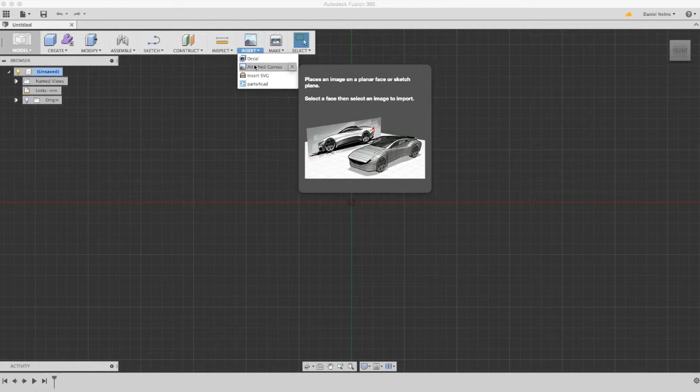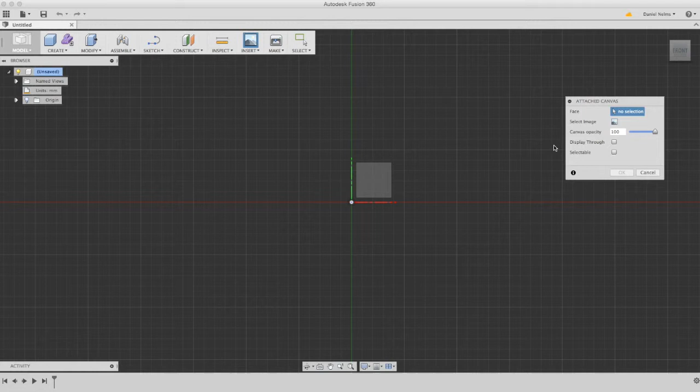I've already found an image on Google that I think will do the trick for me. This is one I downloaded on my phone and sent to somebody the other night. I've selected the image already, and I'm going to select this front view, this front plane, and that's fine where it's at.

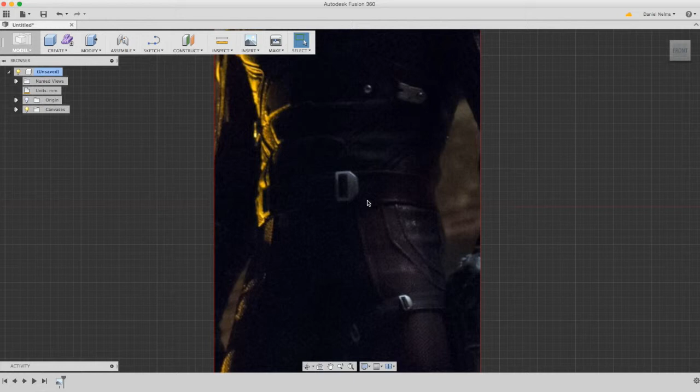Now you can see I'm zoomed out, but it's kind of small. There's a whole lot of things we could do to figure out just how thick this belt is, and I'll probably go out doing that later on, but right now I'm just going to do it quick and dirty. I'm going to assume that this belt, which looks a lot thicker than a normal average belt, is about 60 millimeters.

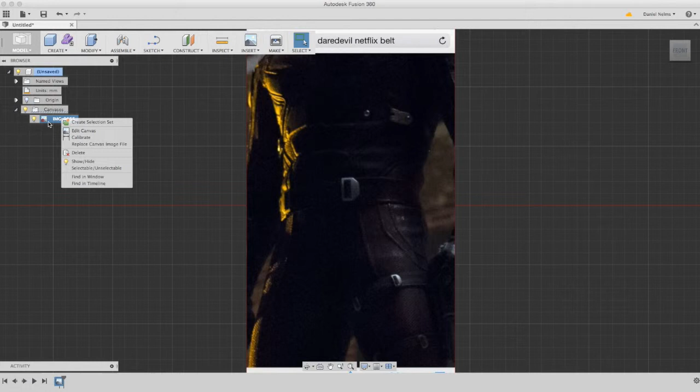So what I'm going to do is go find my image, this is the canvas that we set up, right click on it, and go to calibrate.

I'm going to zoom in, click on the top part of the belt, and click on where the bottom part of the belt is. Based on this image that I inserted, that's 1.8 millimeters. I'm going to calibrate this and assume that belt is 60 millimeters.

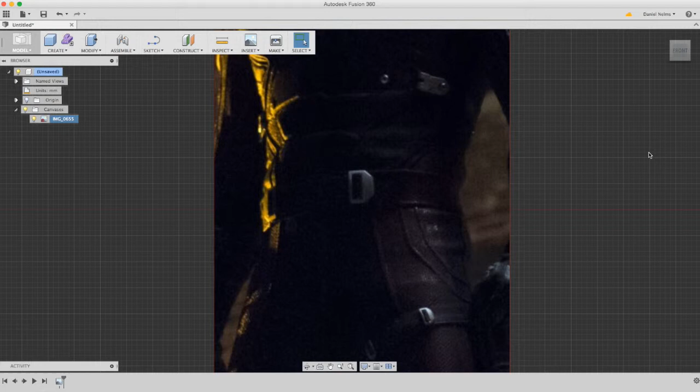Keep in mind this is a really low-res image, but that doesn't really matter. You can see it's blown this image up a lot bigger than it was before, so we can inspect it. Never mind, forget what I was saying.

Okay, I'm going to zoom in here. Here's the thing we want to make, right? So what you're going to do is go up here to Sketch, select a line, and just click anywhere.

All right, so we're just going to do a rough sketch of this whole thing here. Yes, I know I can see that there's a slight curve, but that doesn't necessarily matter. See, what I did was I went up there and made sure that I'm level. See what I did?

There we go. Now you see I just did a rough outline. You can see I kind of messed up right here, this portion is, I think, shorter than this, which is not good. But that's okay, I'm going to fix that.

We're going to measure this from the top down here to the bottom, and it is 60 millimeters. So obviously this buckle is just a little bit bigger than the belt itself, but that doesn't matter. The great thing about 3D drawings is you can scale them later. So if I found out that this was actually 80 millimeters or something ridiculous like that, I could just go in and scale up the 3D design later on. It's not a problem, it's real easy to do.

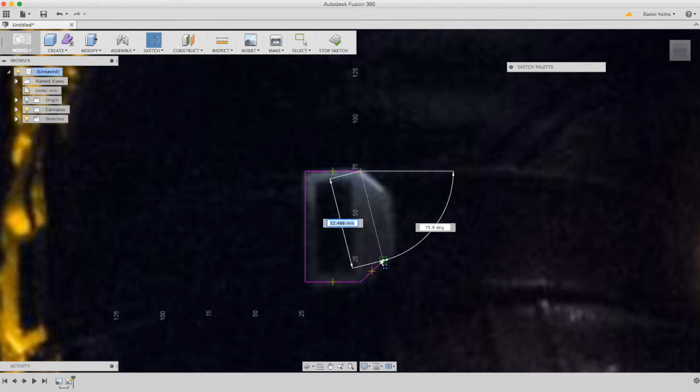I'm going to make another line here. I want it to be straight along here. I really wish I was better at explaining things. Okay, look, you can select a certain point, like right here, for example. So I want these two points to be equal, you know.

Okay, see that green? Man, I wish I could use my finger on this thing. You see the green line? That just means it's a straight line. That's what we want. Okay, and we're going to bring it down to 75.9 degrees. That's good enough, and we can just continue with this line. Okay, see? Nice, fancy, real easy to do.

Now you see that this belt actually goes along a little further, and to me it looks curved. In fact, it looks like it's not even level. That could just be some sort of artifact from the camera, or it could be that when they were doing this in the prop shop they were in a hurry, which is probably very likely, and didn't have time to make it straight. But since this is just going to be a replica, and we're just kind of messing around, we can take the extra time and make it straight, do it right.

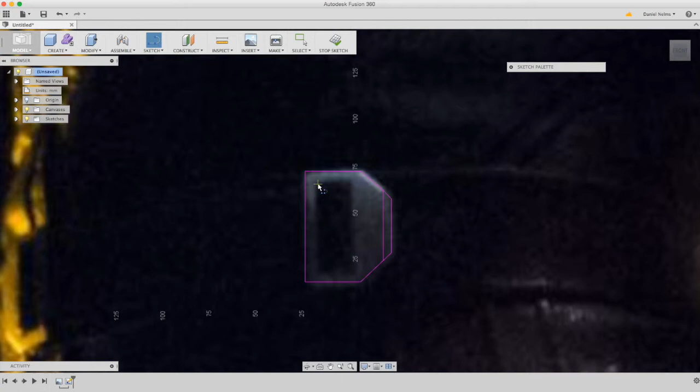So we've got this basic outline, and obviously there's a void here in the middle, so let's go ahead and do that too. See, the cool thing about this program is it will make sure your lines are straight if you let it. It's almost like a snap-to-grid kind of thing.

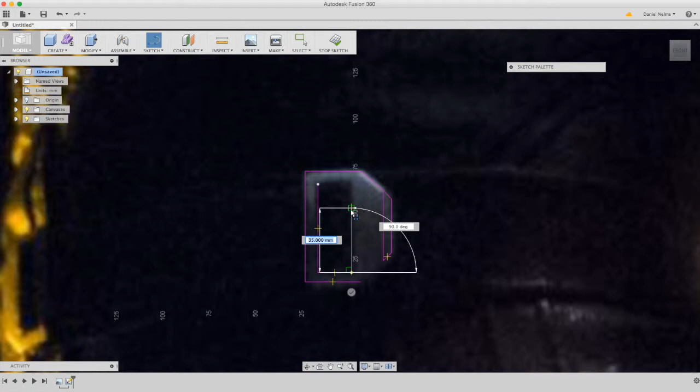So as I'm bringing the line up vertically, you see this little white line to the left of the targeting reticle? See how it's going up, up, up, up. We can keep bringing that up until it changes. Now you see that little white line turned kind of gray, and there are little green dashes in it. That means it's level with the line over here on the left side. That's what we want. We don't want some kind of oblong end where it starts up here and then goes down here. That's not going to look right.

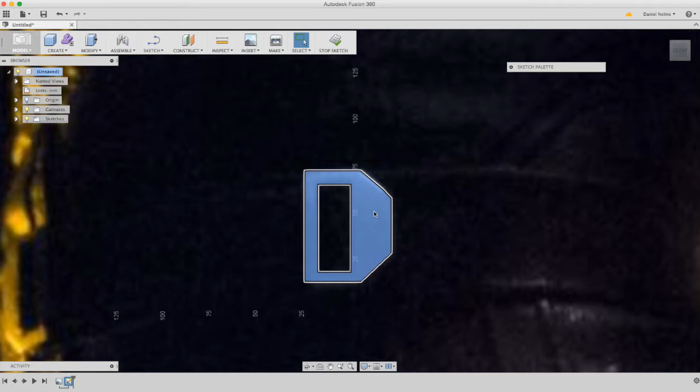So there you go. Went ahead and got rid of that other line. You know what this reminds me of? A belt buckle from a car, kind of. See, click it or ticket. All right, so there you go. There's your basic drawing. That didn't take very long, it took a few minutes. It took me longer just because I'm trying to explain how I'm doing this.

Doesn't have to take that long. Now look, you'll notice one thing here. There is, all right, 7.091, so 7 millimeters difference, distance from this point 1 to 2. But if you look at this point down here, there's only 5 millimeters difference. That's not good, I don't like that at all.

Okay, that's okay, see what I just did there? You can drag this up and down. I'm going to drag it about there-ish. Let's see how much space that takes up now. Excuse me. 6.2 millimeters, okay.

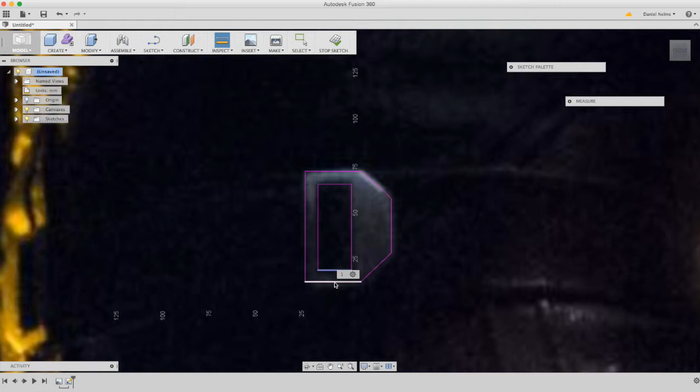That's probably not anything anybody's going to be able to tell with their eye looking at it, but just because, let's just see if we can get it a little bit closer to 7. I just went back down to where I started. That's not good. Okay, okay, let's try that.

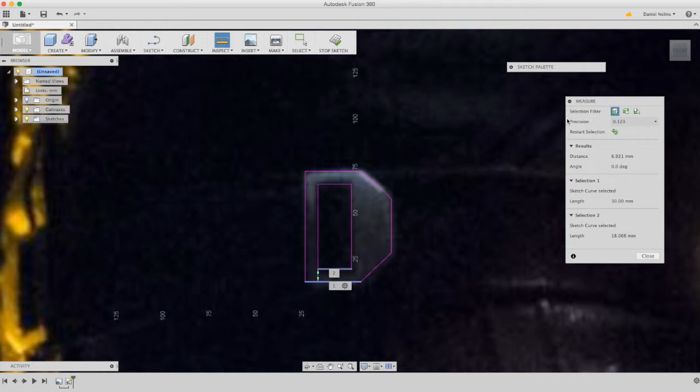6.921, I think that's good enough. Nobody's going to notice that little 0.1 millimeter, so yeah, I'm not worried about that at all. Okay, so now we've got this nice little box here.

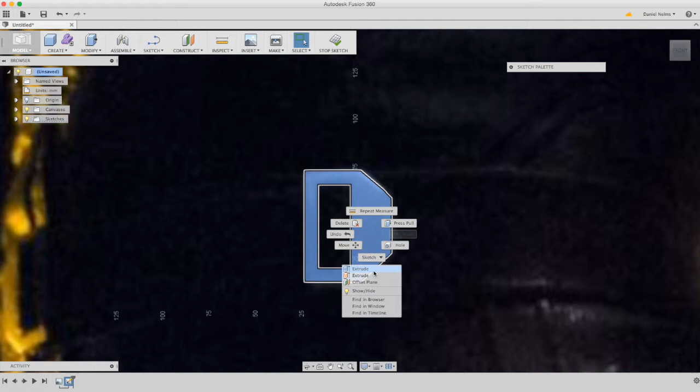This is just a two-dimensional drawing, and we're in a 3D program. So what we're going to do now is extrude this, turning this 2D drawing into something three-dimensional.

Let's see here, we can change our view over to the right hand side, and we can either type numbers in manually like so, or you can drag it up and back down.

Now just for perception's sake, 10 millimeters is 1 centimeter. That is about the size of a sugar cube - a sugar cube generally is a cube size of 10 millimeters, so 10 by 10 by 10. So if you've ever picked up a sugar cube, that's 10 millimeters.

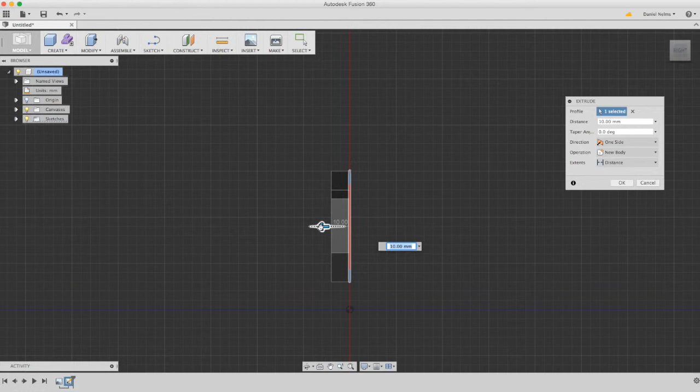I think that's too big for this belt. I'm thinking more like 5, maybe 6 would probably be better. So that's what I'm going to do.

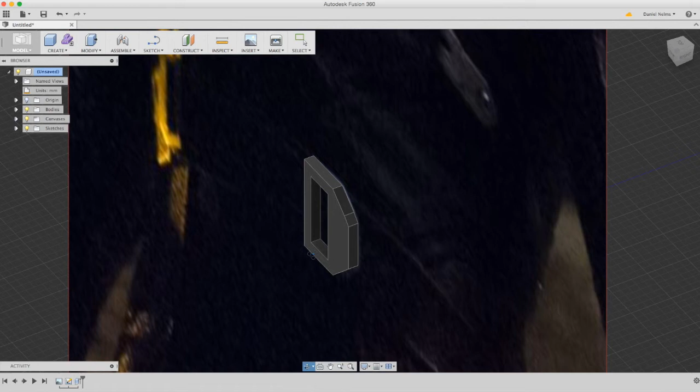Now when you use your keyboard, you can manipulate this thing in different ways. If you hold the shift key - whoa, I went a little crazy - you can do like this and move stuff around, and that's kind of fun, right?

So there we go, alright let's do some fun stuff to this. Okay, I'm gonna add a little chamfer - probably not pronouncing that right, but whatever. Alright, 3 millimeters. Now this is where changing your view is handy. You can do things like that, and see, it basically creates a nice straight edge.

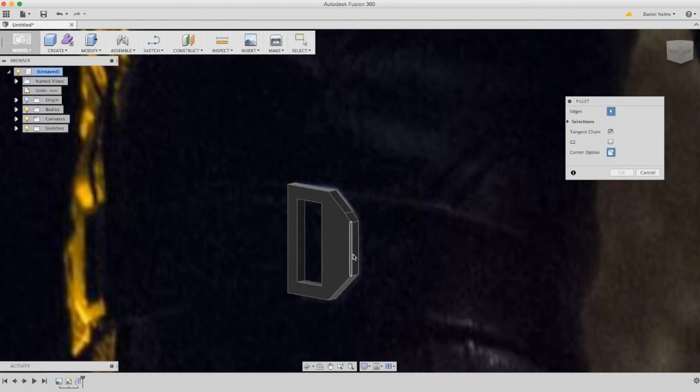I'm not so sure that's what we want. It might be at the end of the day that we want to do that, but let's just do a fillet instead. Let's just see what that would look like, shall we? Just to be a little bit different.

This is going to give it a rounded edge, you see. Instead of a straight edge, it's a rounded edge. I don't know which is better.

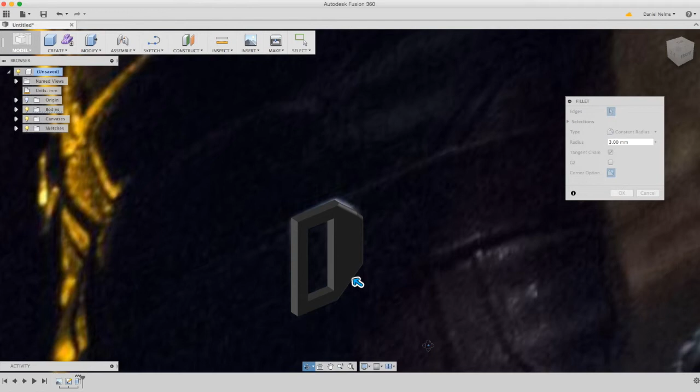There's not enough good reference shots of this, but based on these little buckles, which is pretty much very similar to the main belt buckle, I am thinking that it really should be kind of a filleted edge instead.

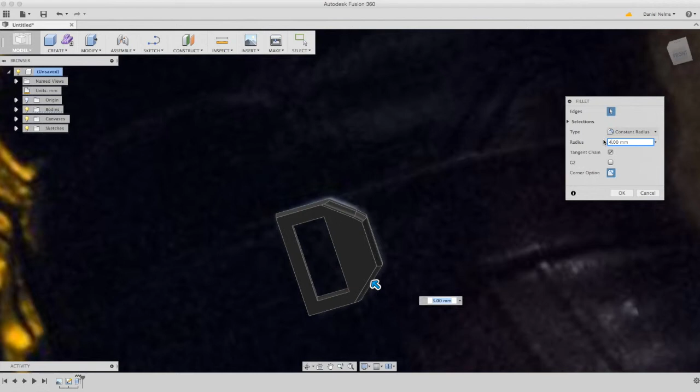But you know, it's not a big deal, we can always go in and change that later. We say, you know, I don't like the way that looks - it's not a problem, it's 3D, it's software. You can go in, you can change anything you want later. That's what's great about it.

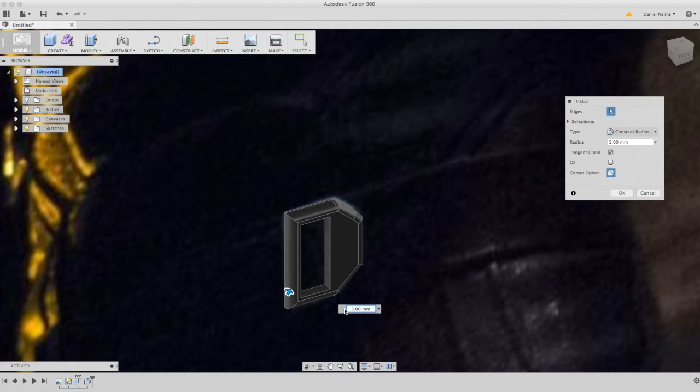Alright, let's see. Maybe like, I think I did the other one at 5. Let's see what that looks like. No. That's better, yeah, I like that. Okay.

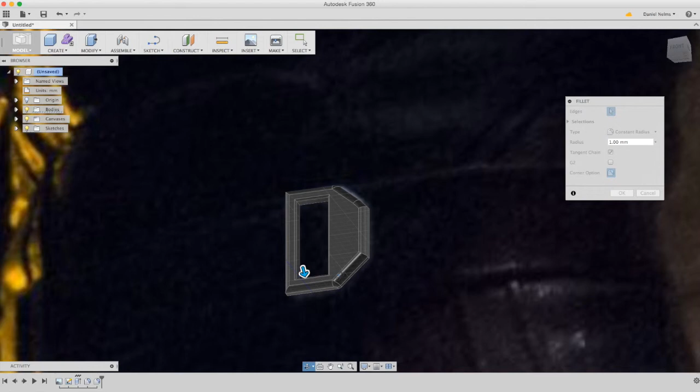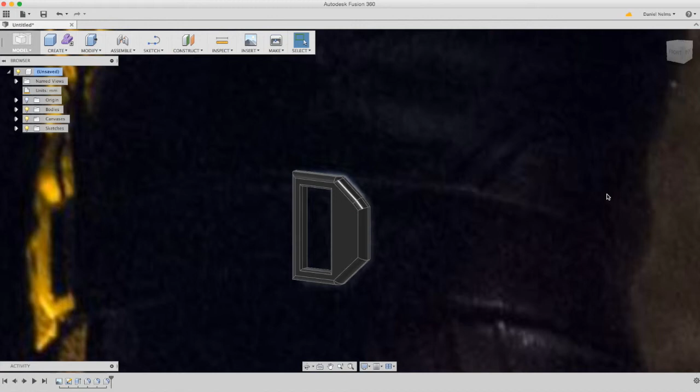Let's do the interior edges, let's see what that would look like, shall we? I'm just going to go kind of weak on these interior ones. There's that 1 millimeter, let's see what it looks like at 2. Whoa, not 200, that would be crazy. Alright no, I don't really like that. I don't like 2, I think 1 looks better. Yeah, alright. And like I said, I mean this is really quick and dirty what we're doing here.

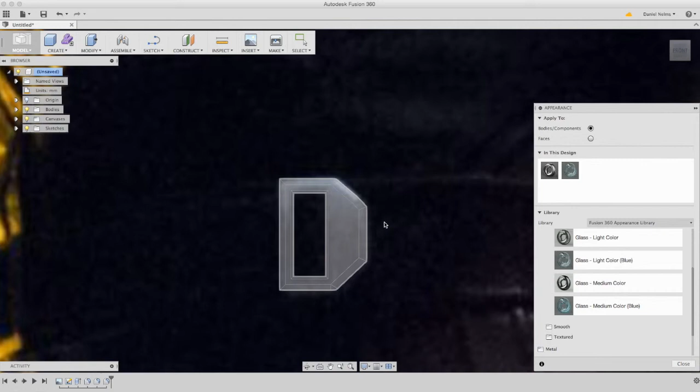Another thing you can do with this is appearances. They give you so many different types of materials that you can use. I can make this, make it glass - you can make it see-through like that. There's different types of metal that you can have.

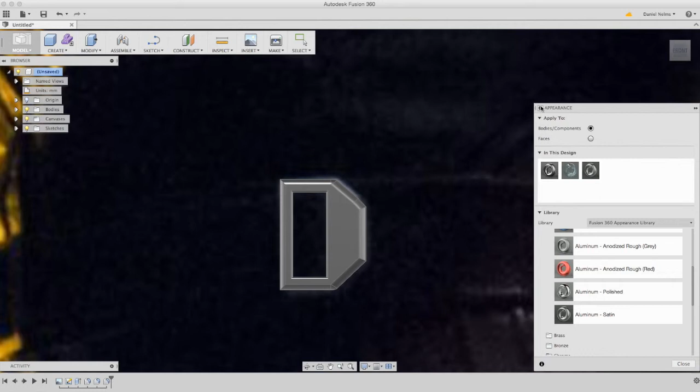I'm thinking aluminum, and you know what, let's see. Let's try a satin aluminum. Now there's what it looks like in this modeling view, but what you can do if you really want to make it look cool is just come over to here and click render. Okay, this brings you to a completely separate viewing point.

So I'm going to get rid of my sketches and my canvas. Alright, and there's our 3D model there just by itself. Okay, I'm going to bring it around here - see that nice shadow? You can change the luminosity in here, the exposure levels, the position of the light and everything, but you can see it's kind of got a shadow.

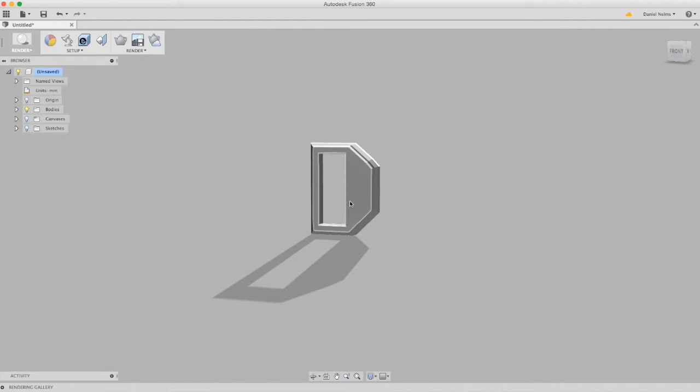Oh, you know what I just noticed? The Daredevil D, get it? That's what that is. Man, I'm an idiot - it took me long enough to figure that out.

Okay, so what I'm going to do here is I'm going to enable ray tracing. You got several different ways to render stuff inside Fusion. This is letting your computer do it for you, basically. The other is cloud rendering. Cloud rendering is a little bit faster if you are in a hurry, but you only get so many cloud rendering credits to use in a year's time.

Since I pay hundreds of dollars a year for this software, I don't typically use the cloud rendering unless I really need to get something done that's business related, or that I'm actually going to be making a significant amount of money on. So typically I won't use it for these prop things, because I'm not making enough money on it to warrant that.

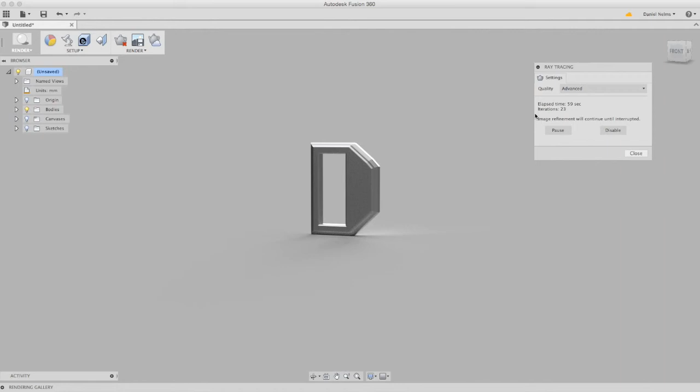You can see it's kind of grainy right now, but with every iteration it gets a little bit clearer. Right now it's on 22 iterations and 23, and it's going to cycle up. Now I can change the view and get it closer, but basically it has to restart, and that's okay.

This is the slow part. Go up, order a pizza, come back later, see what it's done. Eventually it'll finish.

I used a satin type matte aluminum finish, because I thought that would look closer to what it did on that screenshot. If I was going to do this, I would probably make it out of cold cast aluminum by default, because aluminum's fairly inexpensive, and I can get it for about $10 a pound in powder form, versus something like nickel, where I'd be spending upwards of $80 per pound, and it's a lot heavier material. So a pound of nickel goes a lot less farther than a pound of aluminum does. It would be cost prohibitive to use metals like that.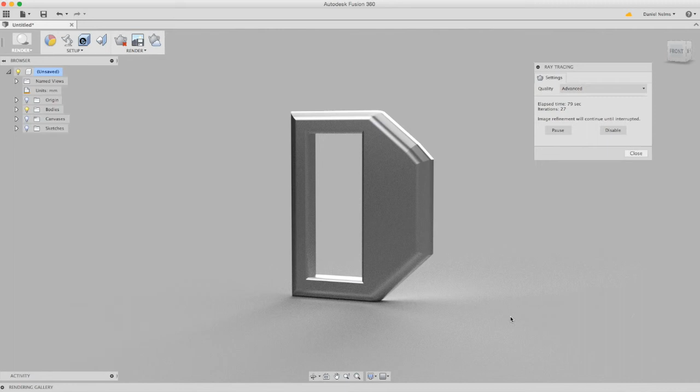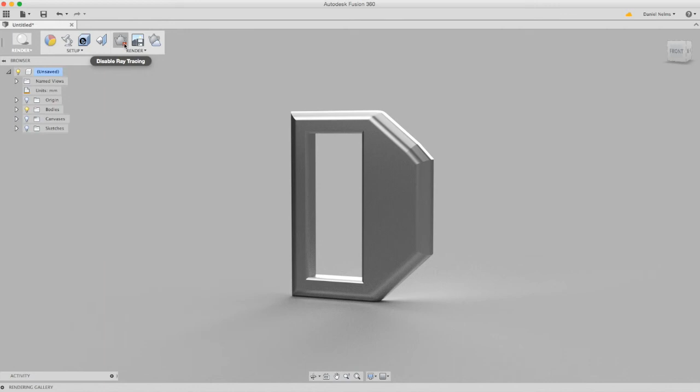So here we are after the 27th iteration. It's looking a little bit better. I could stay here all day and just let it get finer and finer as we go along, but you get the idea. This is what it works, this is what it looks like. Close that and turn off rendering. That's what it looked like before, with just regular quick rendering.

You could use different types of materials. Anodized aluminum. Red might look cool because he's Daredevil. There's just so many different types. There's emissive type, so basically that makes it glow. You could choose foam, gemstones, crystals, rubies, sapphires, paper, rubber, water, different types of wax. There are so many different types of materials that they give you in this software. It's really neat, fun to go in and play with.

Now the interesting thing is, if you are a student, I believe you can get the software for free if you have an edu domain. So if you're a college student, you can pick up the software for free.

Autodesk, a few months ago, announced that for startups, companies that make less than about $250,000 a year, you can actually apply to get a free license. My company makes far less than $250,000 a year, but they weren't doing that when I signed up for this, so I had to pay the $300 some odd a year anyway just to get it. But my loss is your gain. So if you have a company and pull in less than 250 grand a year, if the promotion's still going, you can get it for free. If you're pulling in more than 250,000, then $300 for software for a year is probably not your biggest problem.

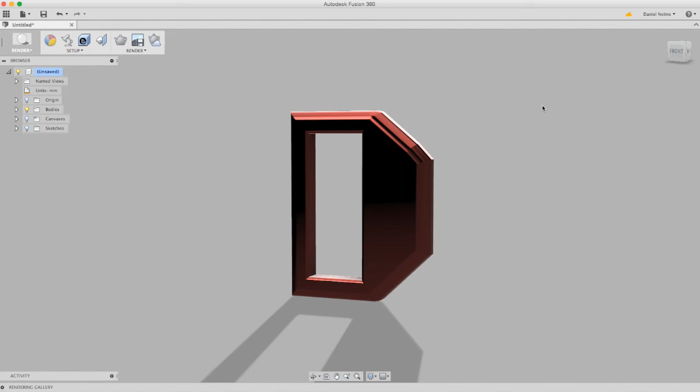Just FYI, it takes a little getting used to this software, but once you get the hang of it, it's really cool. So that's quick and dirty - I wouldn't even call this a tutorial, just a quick show off of how you can go into Autodesk and recreate something from a screenshot.